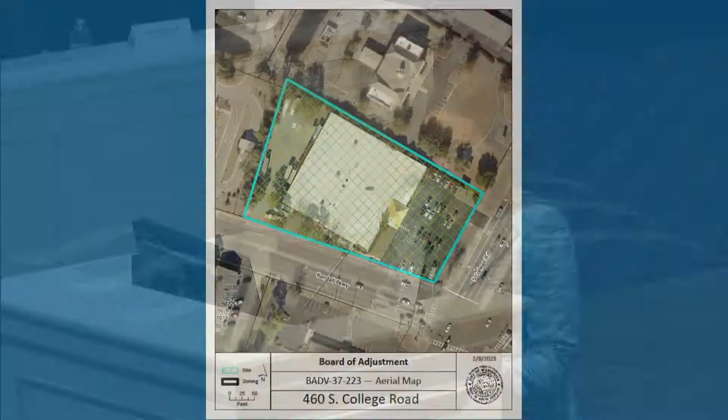On January 3rd, 2023, planning staff accepted an application for a variance to landscaping requirements in the Regional Business District pursuant to City Code Chapter 18, Land Development Code Section 18, 319, 321, and 326. The subject property contains an existing retail store, Rooms to Go, which is proposing a complete renovation of the building and parking area. As part of the proposed redevelopment, Rooms to Go plans to install 26 new parking spaces in the rear and reconfigure the front parking lot to include 44 spaces, a total of 70 spaces. This would be an increase from the existing 46 spaces on site currently.

Land Development Code Section 18-326 requires streetscape landscaping and parking lot landscaping at a ratio of 3/4 the requirement of new construction. Land Development Code Section 18-319 requires a minimum of 1 canopy tree, 6 understory trees, and 9 shrubs per 100 linear feet of street frontage for new construction, and the applicant's proposal requires 3/4 this requirement. In this instance, a total of 4 canopy trees, 19 understory trees, and 29 shrubs along Randall Parkway, and 2 canopy trees, 9 understory trees, and 14 shrubs along South College Road.

The applicant has requested a variance to Land Development Code Section 18-319 to allow for 0 canopy trees, 2 understory trees, and 33 shrubs along South College Road frontage, a variance of 2 canopy trees, 7 understory trees. The applicant has also requested a variance to Land Development Code Section 18-319 to allow for 4 canopy trees, 3 understory trees, and 18 shrubs along Randall Parkway frontage. This is a variance of 16 understory trees and 11 shrubs.

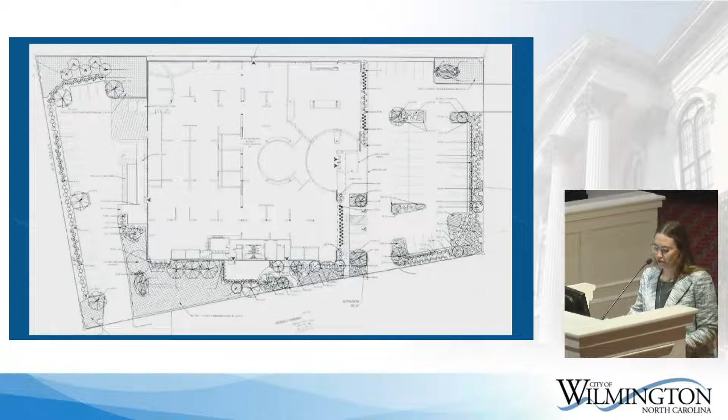The applicant further states that they are proposing to plant 22 grasses and 250 perennials along the South College Road frontage, as well as 45 grasses and 403 perennials along Randall Parkway.

Land Development Code Section 18-321 requires landscaping islands, medians, or peninsulas at a rate of 1 per 12 parking spaces, pursuant to City Code Chapter 18, Land Development Code Section 18-326.

The applicant's proposal would require 3/4 of this amount of parking lot landscaping, and each island, median, or peninsula shall be planted with at least 1 canopy tree and vegetative ground cover.

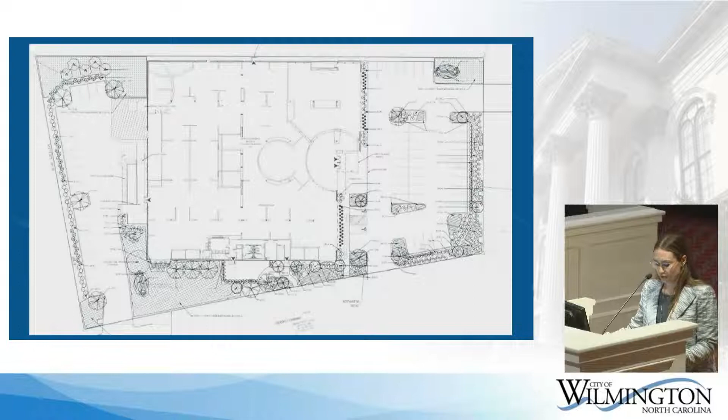The applicant has requested to plant a mixture of canopy trees and understory trees within the required islands, medians, or peninsulas, and further states that they are proposing to revegetate the site using native plants that honor the coastal ecology. This matter is set for hearing today, February 16th, 2023.

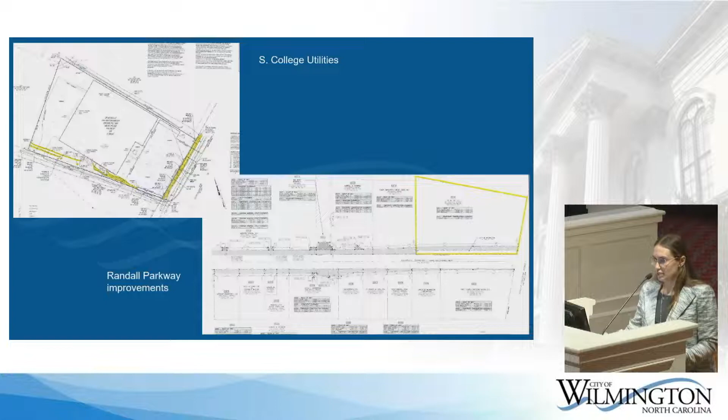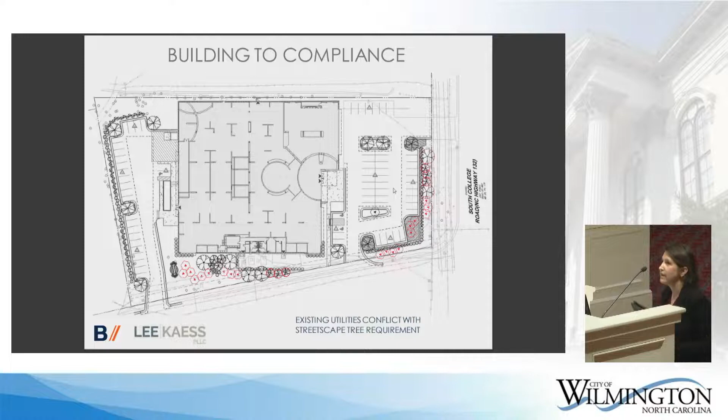This is the site plan if it were to comply with the code, and this is where I'm going to turn it over to Dan, because I don't want to misspeak on any of his excellent work. So if Dan can come up, I'll just ask him to state his name and his qualifications.

Good afternoon, everybody. I'm Dan Danvers. I'm a registered landscape architect in the state of North Carolina, Maine, and Tennessee. Happy to be here today to present this to you. Thank you, Amy and Miranda, for running through this. Covered a lot of ground so far. I'll move through this pretty quickly.

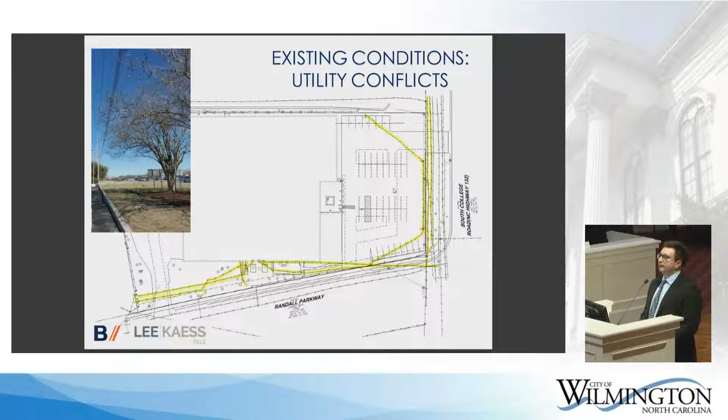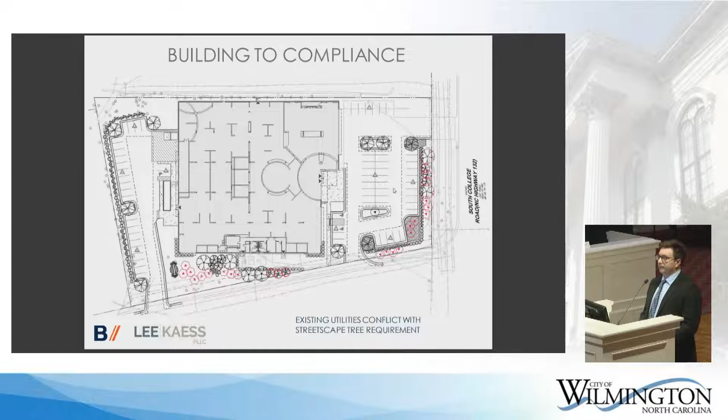As Amy stated, in front of you right now is a code-compliant landscape plan to the letter of the rule. Highlighted in red are vegetation, largely trees and understory trees, that are burdened by utilities on site. If you'll note the highlighted areas, you can see the significant presence of utilities very close to the property line along both Randall and South College Road. So these trees would have either a very short lifespan or the applicant would run into significant construction restrictions when we go to plant them. That's the basis of the variance we're presenting today.

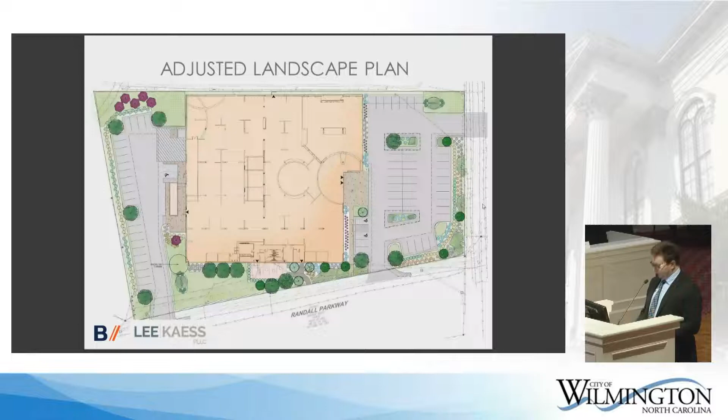We've prepared some graphic visualizations of what this plan would look like. We've illustrated the right-of-way area as an open green. This will vary over time, as Wilmington, along with the applicant, are partnering to improve this area with a sidewalk. So that'll change over time, but you can see the parking lot is very well screened. We are compliant with headlight mitigation stated in the parking portion of the ordinance. Again, trying to depict our massing, this is not a barren site. We're not asking for this variance to remove visual appeal of the site - we're trying to enhance it in a different way.

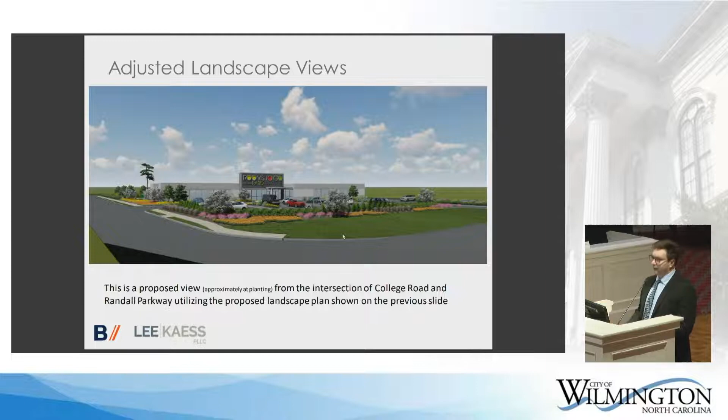This is a view from Randall Parkway, just beyond the site. This is an existing curb cut, and this is where the bulk of our repurposed parking is occurring. You can see here that we're trying to build a lot of massing to remove the lawn, open void area. We're screening all of our equipment, which is on this frontage, and improving the building considerably.

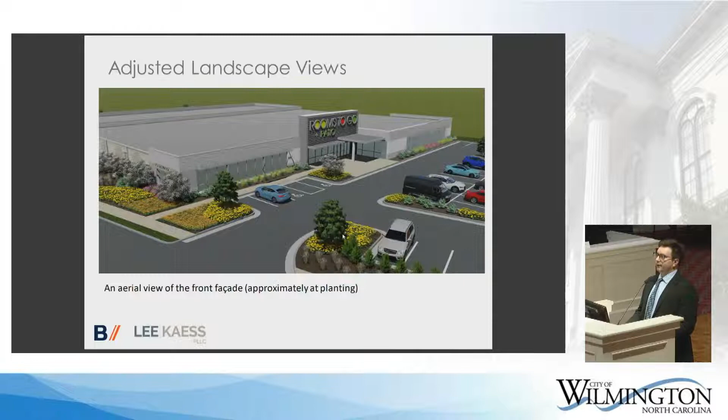This is an aerial view. Walking by the site, you wouldn't see this view in particular, but it does a good job of showing the scale of the parking area and the improvements to the exterior of the building. Again, another aerial view - none of us will be tall enough to see except maybe the linesmen working on the power lines, but this is another view of the front facade.

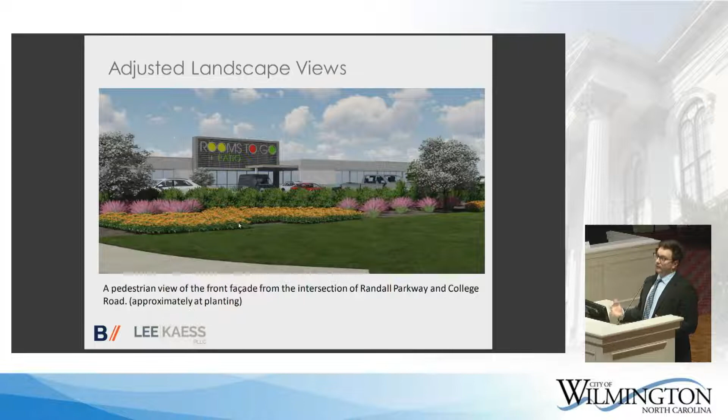This is more of a pedestrian scale view, the user experience at the intersection of Randall Parkway and South College Road. You can see, looking into the site, that the shrub line we're proposing at installation will be high enough to block the lights from vehicles as they park pointing at the road. You'll see a nice massing of native plant materials and native yet ornamentally used grasses. And then I'll hand this back to Amy.

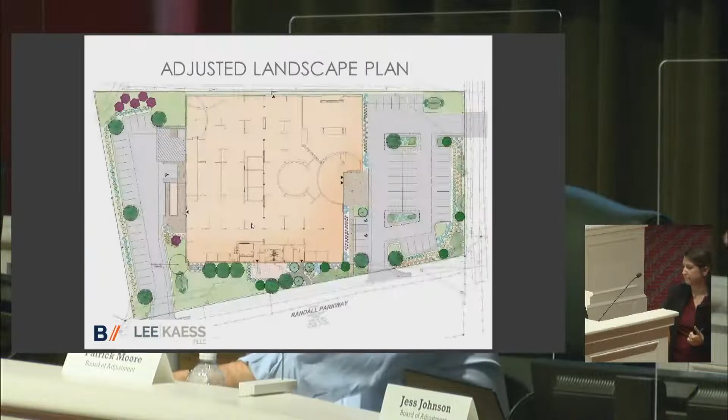I have a few questions. The three large crepe myrtles at the corner—are you cutting those down? I don't see them in your image.

Great question. The three crepe myrtles exist within the right-of-way and are not impacted by the site—to your point, they weren't modeled in the graphic. It is my understanding that as the City of Wilmington and the applicant propose the sidewalk, and as those improvements are constructed, the incidental grading and paving affiliated with that will likely impact those trees to their detriment. So that's the city's effort or work that will result in those coming down? Correct, as they're within the right-of-way. I believe that will be in coordination with NCDOT as well.

Next question: the large sign, which obviously doesn't fit within the new LDC, and I know there's a 10-year period—can you talk about your plan for the future sign, given the massive sign you have in place right now, and what that should look like going forward? I don't know that they've been through sign review. I know we had a pre-technical review, fully understanding that all of that would have to be in compliance with the code. Dan was just trying to pull together some visuals with some prototypes we had, but I'll let Will speak to that a little more.

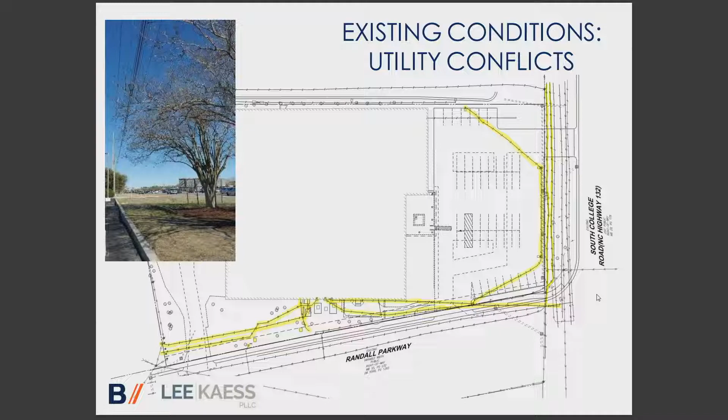I have one question for Melissa about the sign—considering we're looking at the variance for this, are we allowed to consider compliance for the sign and bringing that into the vision for the current LDC? No. Okay, this request is simply about landscaping. Thank you.

Any further questions for the applicant? Thank you. Thank you.

I now open up the evidentiary hearing. Is there anyone here to speak and present additional evidence concerning this matter? Seeing no one, we will close the evidentiary hearing and open for board discussion.

You know, it is a unique property, and as you go by there and walk the corner, everything's pretty tight. The crepe myrtles that are there were a concern, but they're not really on Rooms to Go's property. And canopy trees are going to continue to interfere with the power lines, which makes that kind of a short-term solution.

Good afternoon, members of the board. This request is for a variance to the separation requirement between outdoor advertising signs, more commonly referred to as billboards, and residential zoning districts. The subject property is located at 1601 South College Road. It's shown on your screen there in the green hatching. And it is across Parkway Drive from Longleaf Park.

On January 3rd, planning staff accepted an application for this variance request. The property is zoned regional business, and it's in an area that's classified by the city as a receiving zone for billboards. So the city, whenever we rewrote the billboard ordinance, designated certain zoning districts and certain locations to be acceptable for relocating existing billboards to. This is one of those areas.

The subject property has a commercial building, multi-tenant, and a parking area that will remain.

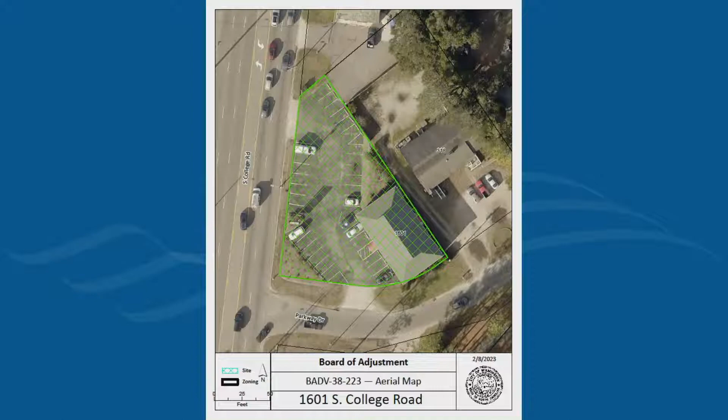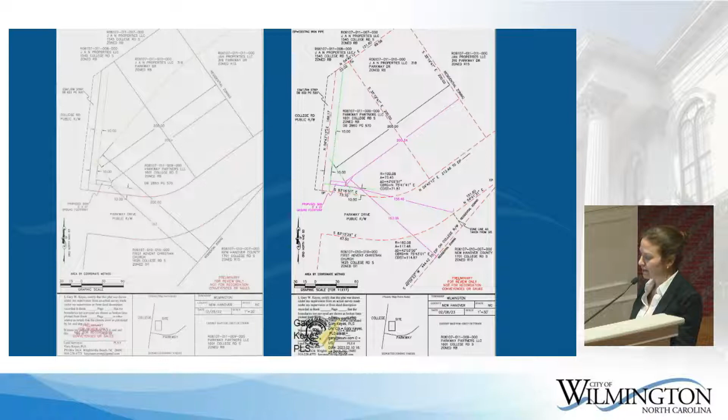The applicant did prepare a sealed survey, shown on the right. It's an updated survey that shows the distance of the proposed billboard to the residential zoning on the church site, as well as the residential zoning for the park. So the applicant is requesting a variance of 37 feet to allow the proposed billboard within 200 feet of a residential zoning district, and they are here to make a presentation as well.

But I'll be happy to answer any questions you may have of city staff. Any questions for staff? Just one.

So the area that this sign is in, it was determined to be a receiving zone. Yes, the idea was to remove billboards from gateways and allow the reconstruction of billboards, because when the ordinance was rewritten, many of the billboards we had within the city were wood piling structures, and all billboards in the city are considered non-conforming uses.

However, we did want to encourage them to update them to make them look more attractive, and what we're seeing more demand for is monopoles. We didn't necessarily want to discourage the placement of monopoles as opposed to multi-pole structures, so we allowed them to rebuild in place as monopole, and since then the General Assembly has made it very clear that's allowable under state law. But we've also tried to identify areas that are more appropriate for billboards.

Some of that is taking into consideration residential districts versus higher intensity commercial districts, and certain corridors that seem more appropriate for billboards. Okay, and this is one of those areas. It just happens to have the distance of that receiving area close to a residential zone. I guess it's something we'd look at in the future if we have others.

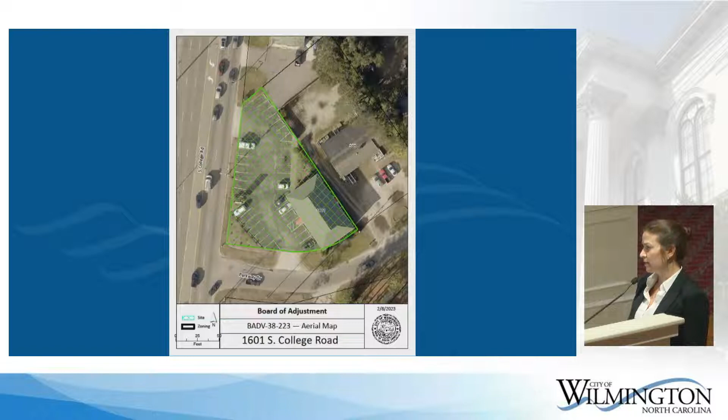Well, frequently the districts identified are commercial services, regional business, and higher intensity commercial districts that aren't typically directly abutting residential, but in some instances it occurs, and that's why that separation requirement was put into place. Okay, thank you.

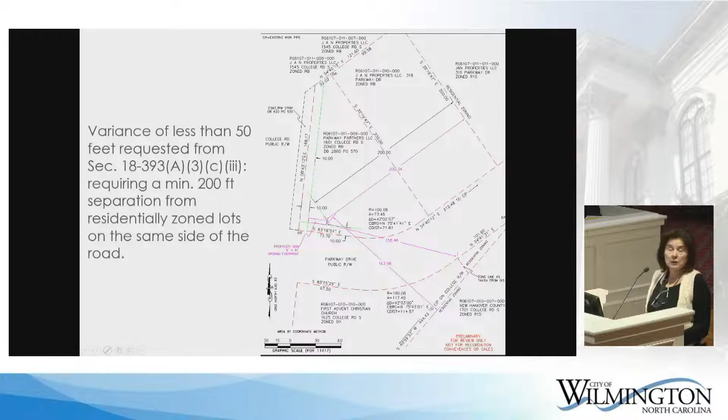Excuse me, my name is Anna Patsalos, and my opinion is that I don't believe a huge sign like that should be on that particular place because of the huge traffic and distraction of different drivers. I also own the residential property that Mr. Grace had, and I believe it's less than 200 feet from the residential. Actually, he approached me about a month and a half ago and asked for my approval to do that because it's short. I said no, I need to follow the city's rules. That's why I'm here today. I need to oppose, and I don't agree on that.

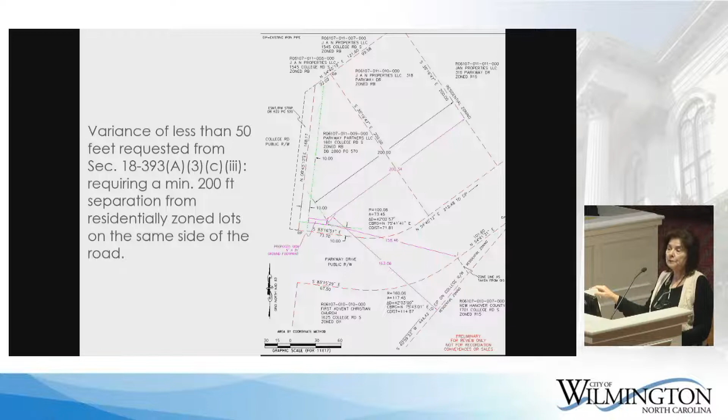There's a lot of residential houses on Parkway Drive, especially one person who has been there over 50 years, my neighbor. I don't know what he said about the Mr. Fix sign—I own that property, and that is going to interfere with his sign also. I don't know what else, any other questions you have for me? Any questions? Okay, thank you so much.

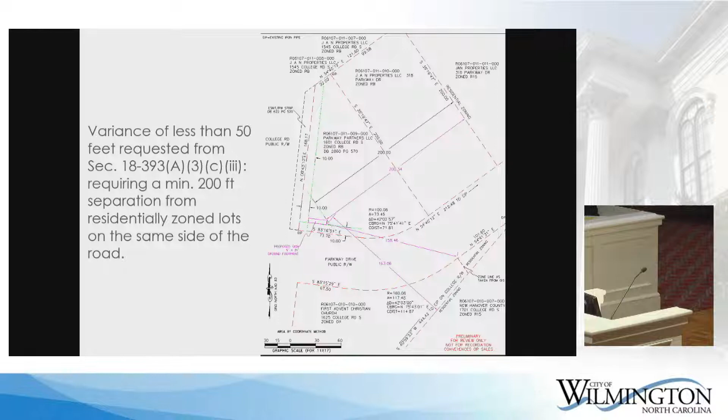Is there anyone else here to give additional evidence on this matter? Anything additional from staff? Yes, I would like to point out that on the slide that showed the request, it said they were requesting a variance of 37 feet, which would apply if the residential were only on the park property. However, to accommodate that residential sliver on the church's lot, they would actually need a variance of 42 feet.

I'll close the evidentiary hearing and open up for board discussion.

I've closed the evidentiary hearing. I'll reopen the evidentiary hearing. Yes, ma'am, come forward.

Mr. Gray also told me that he has a surveyor, and he said that he makes the 200 feet from the residential. I wasn't prepared for that because he told me it was less than 200.

I would love to have my surveyor do that. Okay, well, his survey does show it's less than 200 feet. It does show less than 200? Ma'am, because he just told me it was 200.

Yes, ma'am, I believe that the residentially zoned property in the upper right-hand corner is what she's talking about, and that is 200 feet from the residentially zoned property. So if that were the only property we were talking about, we would not need a variance. We would just submit the survey to the city. And if there were conflicting surveys, that's a whole different issue.

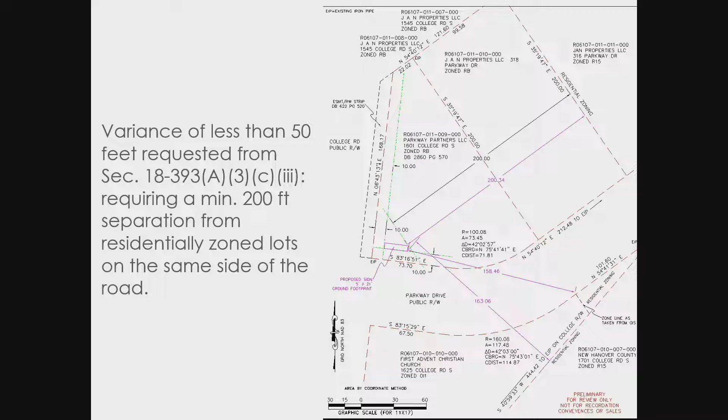I believe that's the residentially zoned parcel she's talking about. Okay, I see. Thank you. Okay, thank you.

I will now close the evidentiary hearing and open for board discussion.

I know the city wants to remove the gateway billboards, which is a primary concern, but that is right on the corner at Parkway and College. I've got a little bit of a reservation with its location.

Yeah, it doesn't meet any of the findings of fact. At the end of the day, it's too close. And...

I don't see hardship. There's nothing peculiar about the property. It's too close to the residential. It's too close to the park.

Seems to me that this is a self-created hardship rather than one that's been created by the property. And the variance request is actually a little bit larger than what was initially proposed.

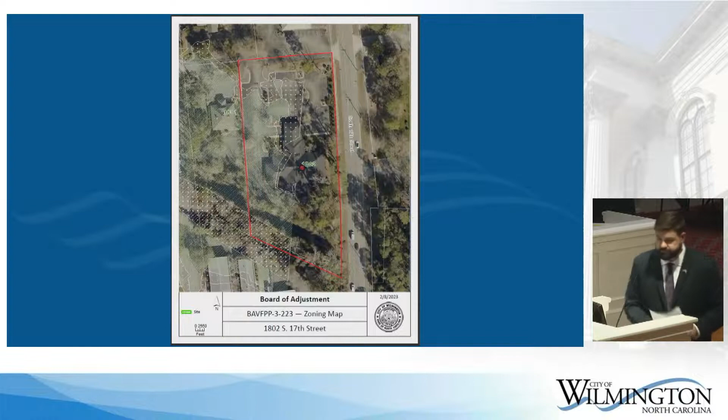Good afternoon again. Final one, I promise. Amy Schaefer with Lee Kaess. I'm here on behalf of the applicant and property owner, Beacon Education. I'm also here with Zach Messick from Monteith, who is the builder.

I had some technical difficulties, so we're passing out a site plan — it didn't show up very well in my presentation. I'd like to be very clear, this is an adaptive reuse of a current building. As Mr. Moore said, we are not expanding the building footprint at all. In fact, Zach and Todd can speak to this better, but when we first came in, we were under the 50% threshold.

Due to the improvements to the property and the project, as well as the increase of cost of materials during the planning process, we were kicked over the 50% threshold. We've had multiple appraisals, and there's some back and forth of whether we are or not. So we just decided to go ahead and bring forward the variance request instead of having those kinds of conversations, because again, we are not increasing the footprint of the building.

So again, this is the old Women's Health building between 16th and 17th Street. It's been vacant for a while. It was used as a COVID site for some time for testing, and so just to kind of orient you as to where we are.

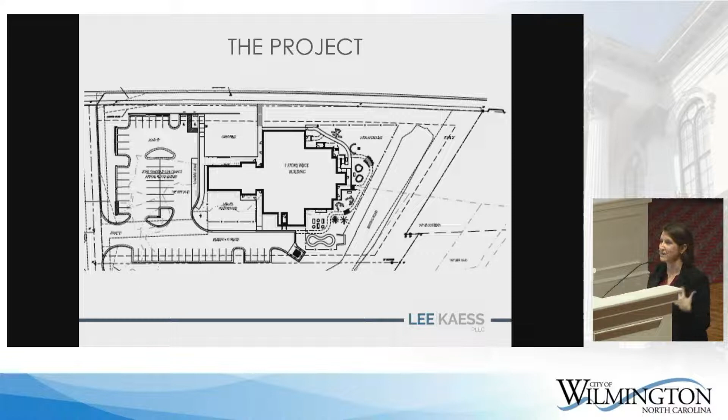So all of these increase the cost of our construction. In addition, I think there's going to be a commercial kitchen, but again, I'll let the experts speak to all of that. So again, we are completely compliant with FEMA standards. The variance that we're requesting is only a 0.4-foot variance from the city's 4-foot freeboard requirement.

And so with that, I will ask Mr. Messick if he can come up and introduce himself and walk you through any of the project plans that you might have some specific questions about. Thank you.

If you could just state your name and occupation and qualifications. Good afternoon, everyone. Zachary Messick with Monteith Construction. I work in the pre-construction department. Here on behalf of Todd Godby, Glow Academy, Spark Academy.

So just to start off, this is largely just an architectural upfit to the interior of the building. Oh, I don't know if you wanted the site plan. Sure, yeah. Feel free to interrupt me with any questions you may have.

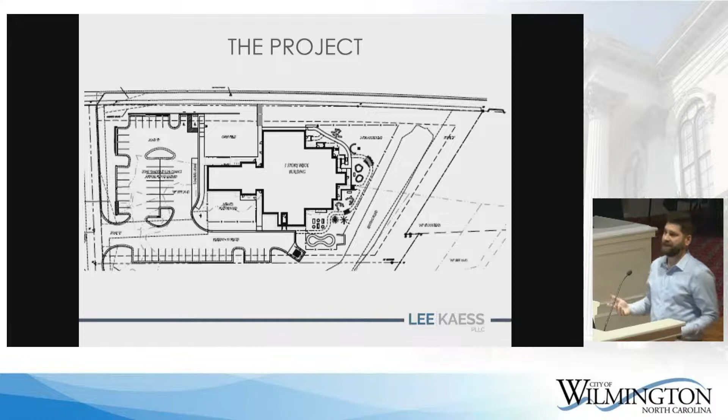So basically what we're doing is an interior upfit. The cost of drywall's gone up. The cost of glazing in the last year since summer is up about 40%. Across the market, we're just seeing general escalation. That's kind of the pinch point that's brought us here today.

The appraisal, as has been mentioned, we've had a little bit of ebb and flow on that assessment. But overall, this is a dire need for our area. I think everyone can understand that. The location is absolutely perfect in relation to people that may not be... well, how can I say this... bus traffic and things of that nature, everyone in that surrounding hospital area.

The upfit is largely going to be drywall, flooring, new ceilings to be replaced, things of that nature. One of the big cost drivers is definitely the commercial kitchen to serve the kids ages 0 to 5. So those are the primary pinch points driving the cost.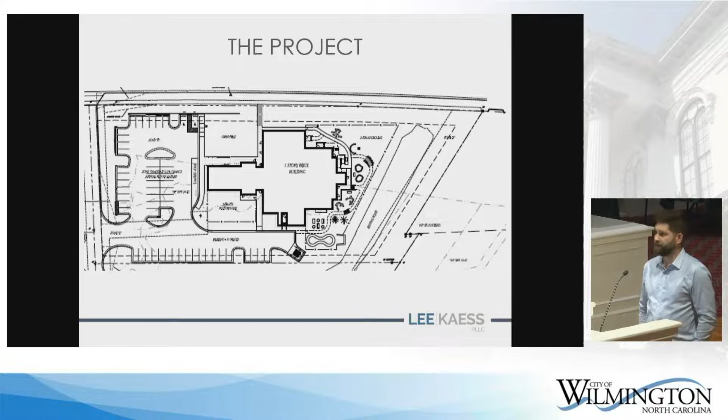And then just to quickly walk through the requirements for a floodplain variance, do you mind just going through and addressing each of those briefly? I think we talked about that. Again, I don't think there's any danger of materials being swept into other lands. There's already a building there. And it's my understanding that through research, there's been no history of flooding or claims.

Yes, ma'am, that's correct. We've actually done some preliminary research as we were trying to develop the design of the building. We did some architectural interior demo, pulled some walls open just to assess it, and I can confirm there's been no flood impact since the building's been built.

Beyond that, it's largely a no to all these questions. The crux of the matter is the Wilmington OBGYN never experienced any issues, and we're basically here to not change the elevation of the building. Having to do that would virtually be a non-starter for the project and would have a marked impact on the community in general. We would have to level the building, which in turn would just cancel the project.

So again, I think we've clearly covered the importance of the services that the proposed facility would have. It's not applicable, since we're not a waterfront location. Alternative locations, I think we discussed why those probably wouldn't be the best situation for this. And again, we don't think we are subject to flood damage. There's no history on the property that we could find.